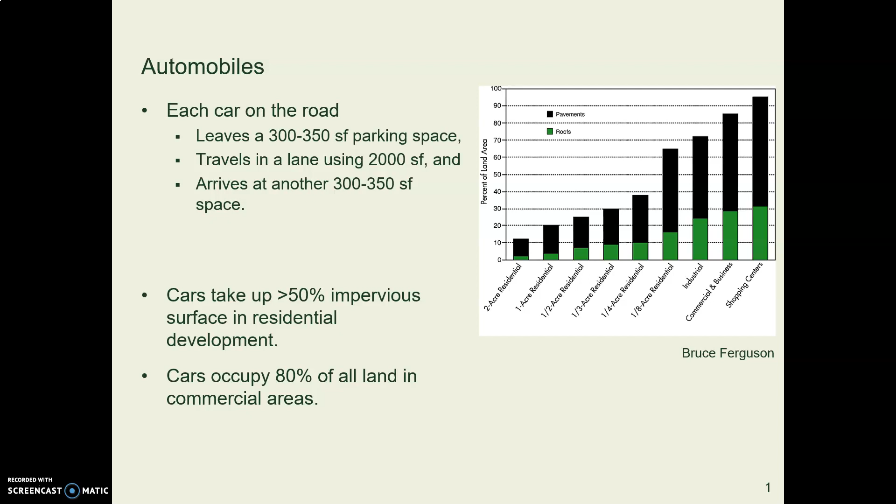cars and their impervious surfaces take up 80% of the land. So what can we do about that? What we can do is replace that impervious, solid surface pavement with porous or permeable paving. That means water can run through the paving and go down to the ground below and infiltrate.

So porous paving is actually a reservoir of rocks with some kind of porous surface over the top. That's the way it works.

Some years ago, in an earlier generation of staff at the college, some staff who were interested in sustainability were looking at a parking lot, and they said, we would like to do the right thing. We would like to put in a porous parking lot. So what should we do? And sadly, I had to tell them that it was going to be expensive.

What I did was put gravel in a bowl. I got a bowl, put a bunch of rocks in it, and put a piece of hardware cloth, wire screen, over the top. Then we sat down and talked, and I showed them how the bowl was like the reservoir in the parking lot, this deep reservoir of rocks that actually does the work, and that paving, whatever it is, bricks or whatever you've got over the top, is the surface that lets the water through. But you have to have that bowl of rocks underneath, at least 18 inches deep.

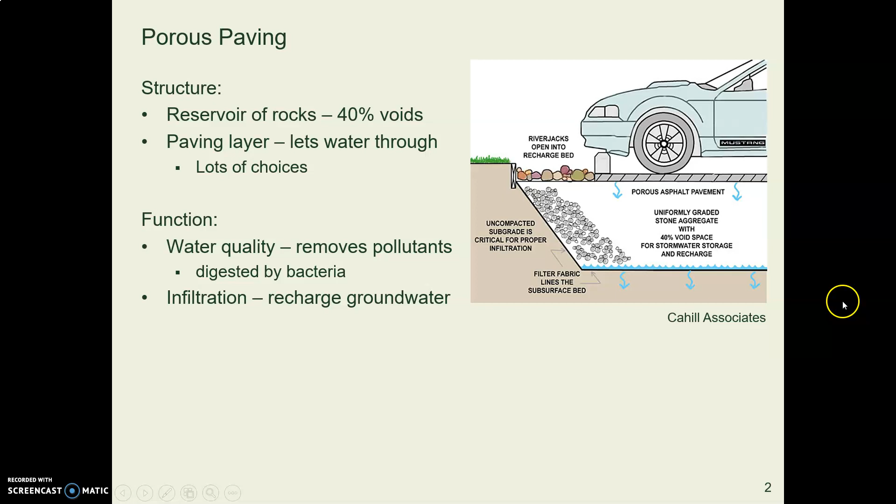This reservoir of rocks does two things. First, those rocks provide surfaces for bacteria to live on, and the ones who take up residence are the ones who really like to eat petroleum. So as stuff drips off the cars, those bacteria in the reservoir start eating that petroleum and breaking it down, and they break down a few other kinds too. Then, as the water drifts down through this bed of rocks, it gets down to the soil on the bottom and can infiltrate and recharge the groundwater.

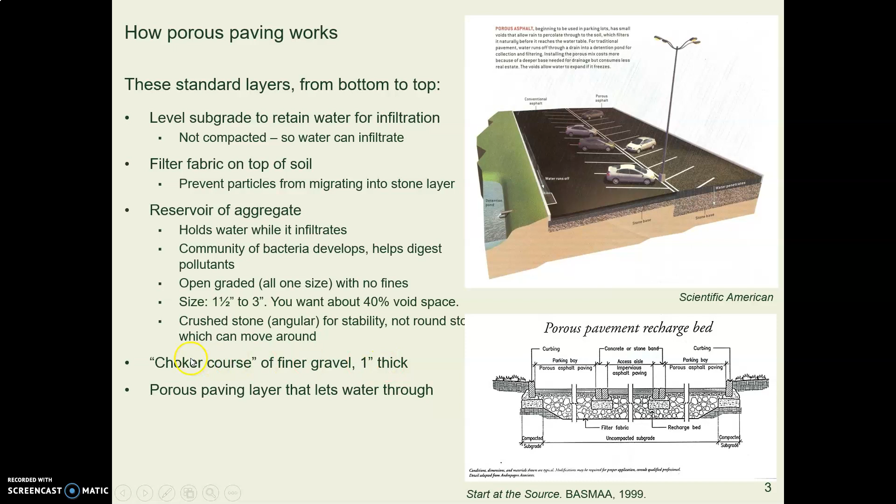There's a whole series of layers, starting at the bottom with the plain soil and coming on up to the reservoir, a thin layer at the top, and then your porous paving, whatever it's made of.

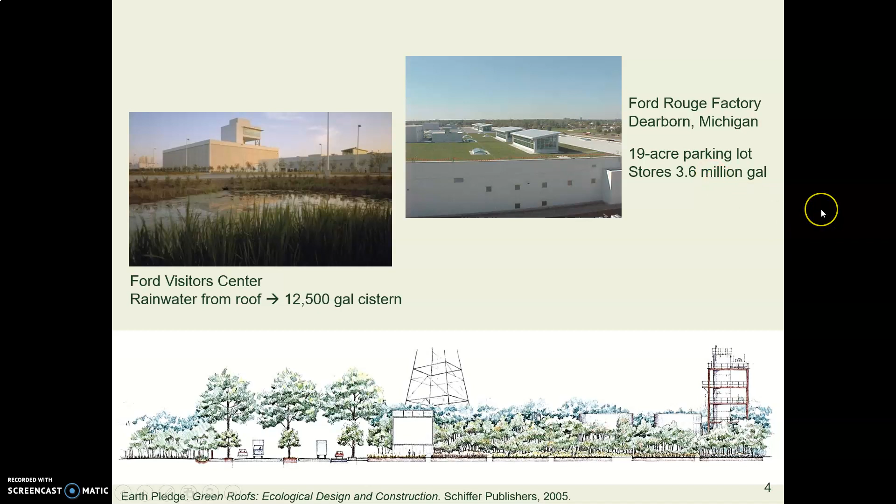Here is just a nice example of a vast porous paving parking lot, well, 19 acres, at the Ford Rouge River truck plant. And according to the designer, it stores 3.6 million gallons of stormwater runoff.

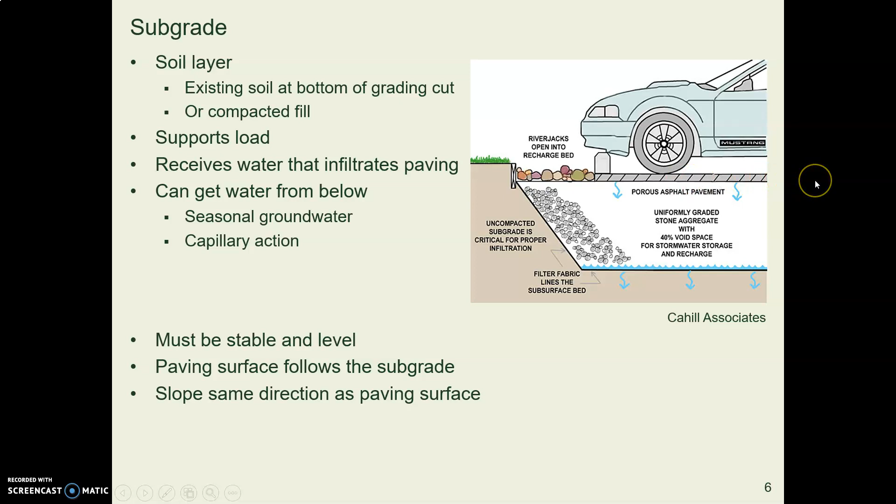And it has to be stable, has to be relatively level, but it will be at whatever angle your paving surface is at.

Now, some people will say, oh, we can't put a porous paving here because our soil is not permeable enough, we can only use sandy loam or whatever it is. But I call your attention to this recognized expert on stormwater, Bruce Ferguson. There are two prominent experts on stormwater that I turn to in the U.S., and one of them is all the people in Portland, Oregon, especially people at the Bureau of Environmental Services, and Tom Liptan, and Bruce Ferguson, who's a professor at University of Georgia, and he's done a ton of research gathering data on how this stuff works.

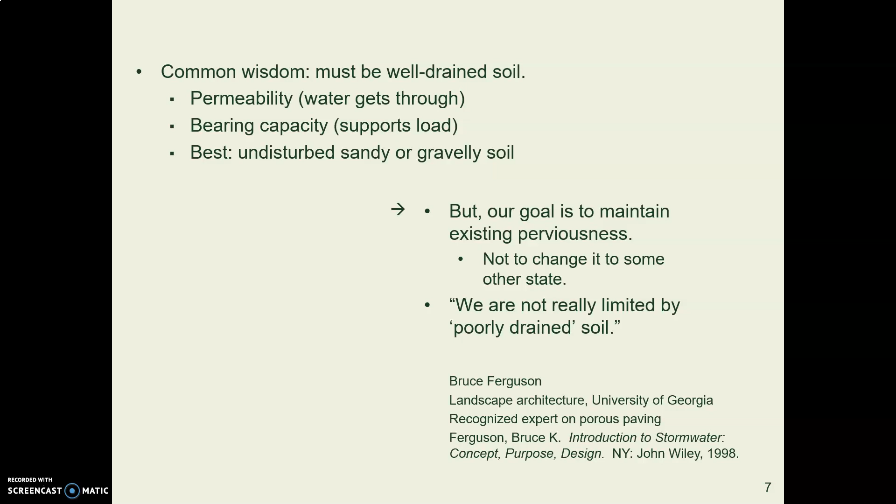And what he says is our goal is not to change to some other kind of soil. Our goal is to restore the hydrologic cycle, whatever the condition was that was there before we paved over it. So we're not limited to sandy soil, we're not limited by poorly drained soil — we're going to use what is on site.

That was the subgrade. In the reservoir, that thick layer of rocks that stores the water has to be open graded, they say. And open graded means it's all one size of rock.

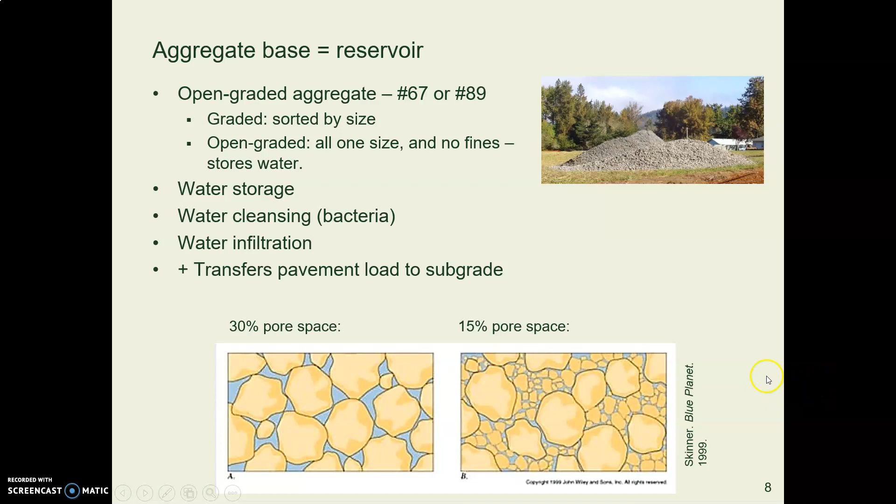And just a point of interest, where do you get open graded rock?

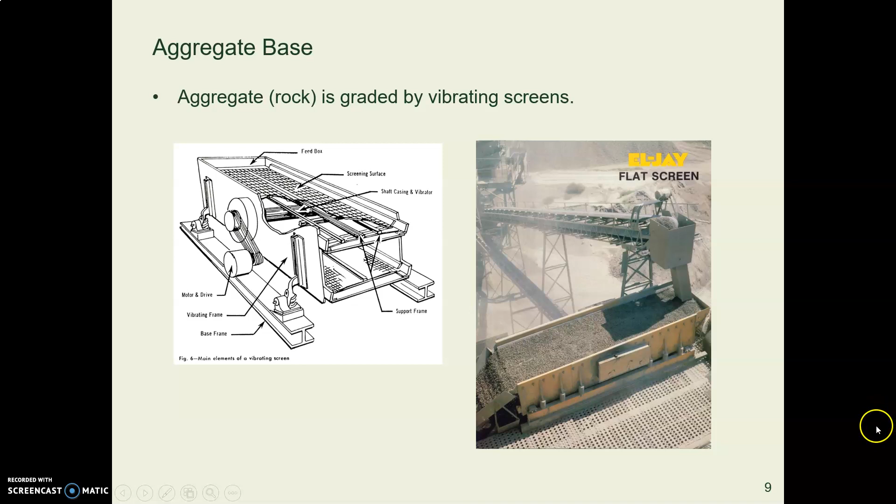Sand and gravel pits, including some in Eugene and outside of Eugene, use vibrating screens with 2 or 3 decks of wire cloth. They vibrate back and forth, and rock dumped onto the screen is sorted: whatever is bigger than the opening bounces off and gets carried away, while whatever is smaller falls through to the next deck, where a different size of wire cloth repeats the process. As it passes through these layers, the rock gets resorted until you wind up with the same size rock.

Then the paving, the part that you see, is the covering that lets water through. It sits above this reservoir, and you can use unit pavers for this.

A magazine I subscribe to and always like to read is called Interlocking Concrete Pavement magazine—believe it or not, that's a thing. This picture is from that magazine. You can buy these pavers shaped so there are holes in between, and you can put pea gravel or sand underneath so the water runs through.

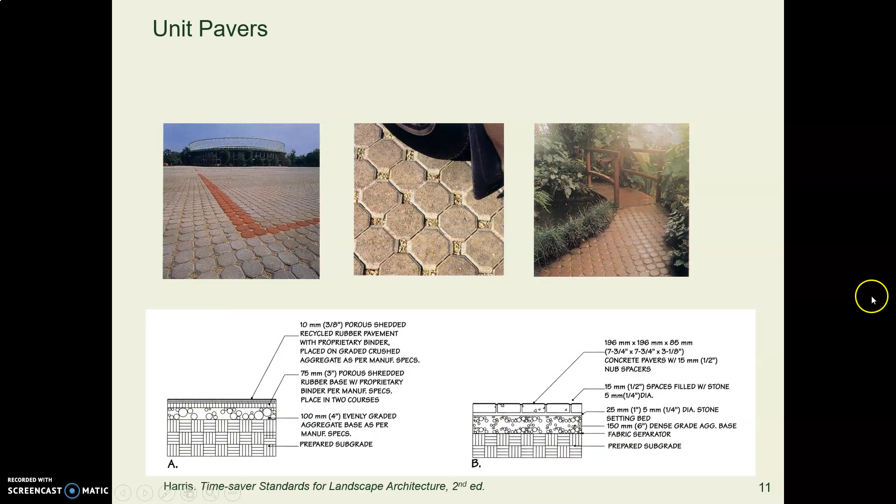You do need some kind of edging so the pavers won't gradually walk off the parking area.

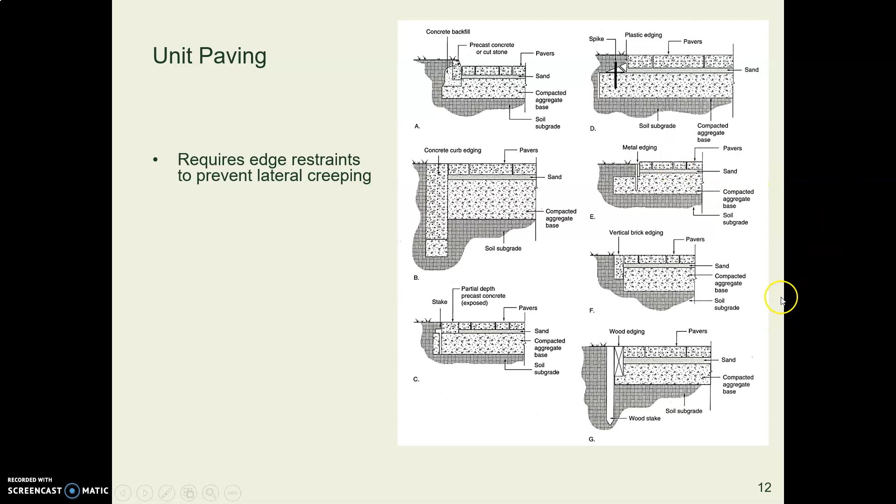An inexpensive way to have a permeable surface is with gravel or something like decomposed granite or pea gravel. You might find that in pedestrian walking places, and you can use it in parking lots too. It's a little bit squirrely—it rolls around—and you do have to have some kind of edging. It's kind of a pain to maintain because the rocks roll all over the place and escape. Also, if this is for a place with pedestrians, this is not an accessible surface—try rolling a wheelchair on this stuff and you won't like it.

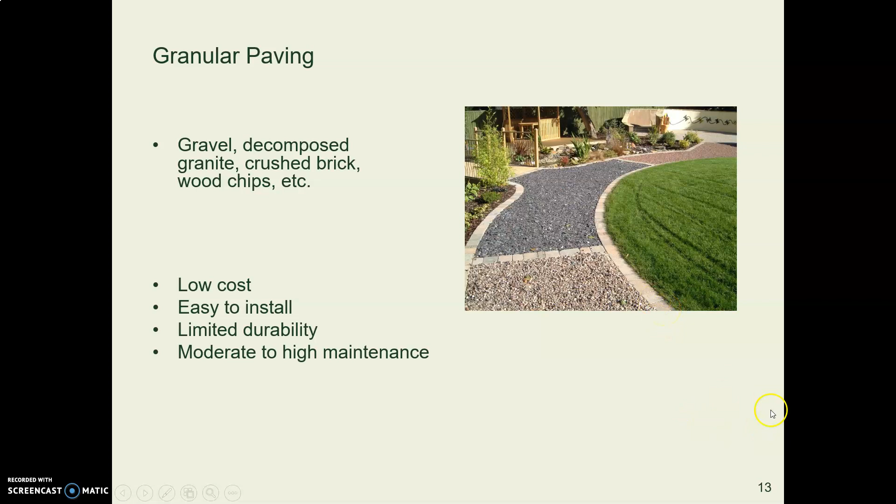You may have heard of turf pavers, which come in all different styles. The two basic ideas are some kind of plastic grid or cell, or some kind of concrete cell. You put that down on the layer underneath, and it's strong enough to hold up cars, trucks, and even big emergency vehicles. Then you plant grass in the spaces in between, and it grows up through the concrete or plastic cells. From a distance it looks like a regular lawn, and maintenance crews can come in and mow it.

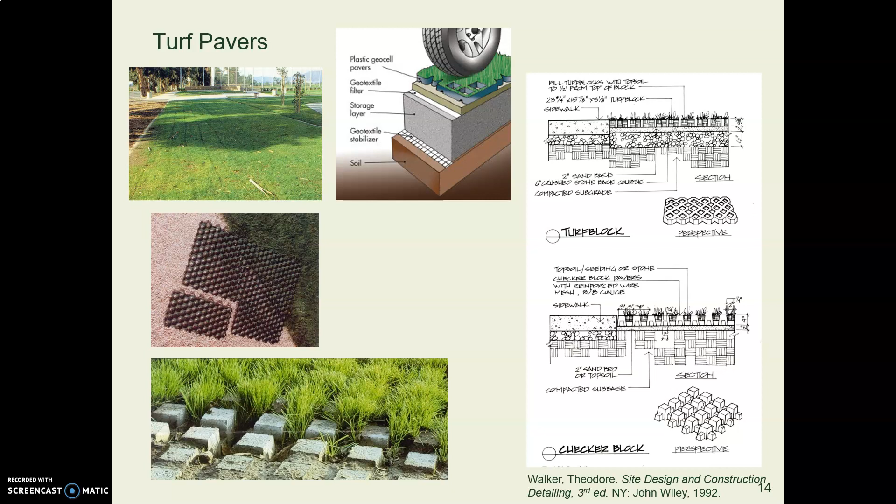You see this kind of thing often in overflow parking lots at sports arenas, and also in places where you want to maintain something that looks like a landscape but still want emergency vehicles to be able to drive over it.

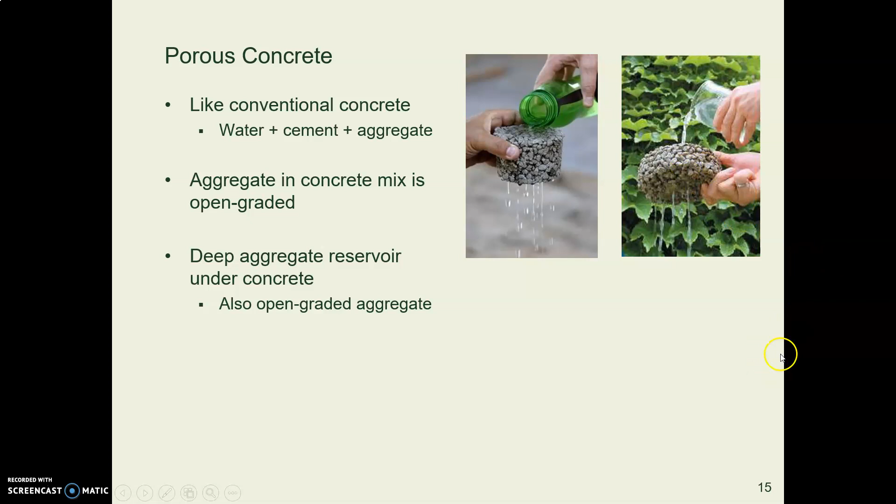Porous concrete is regular concrete, except the aggregate—the rocks—is open graded. It's just like a regular concrete mix of water, cement, and aggregate, but all the aggregate is one size. The same is true of porous asphalt: it's open graded aggregate, all one size.

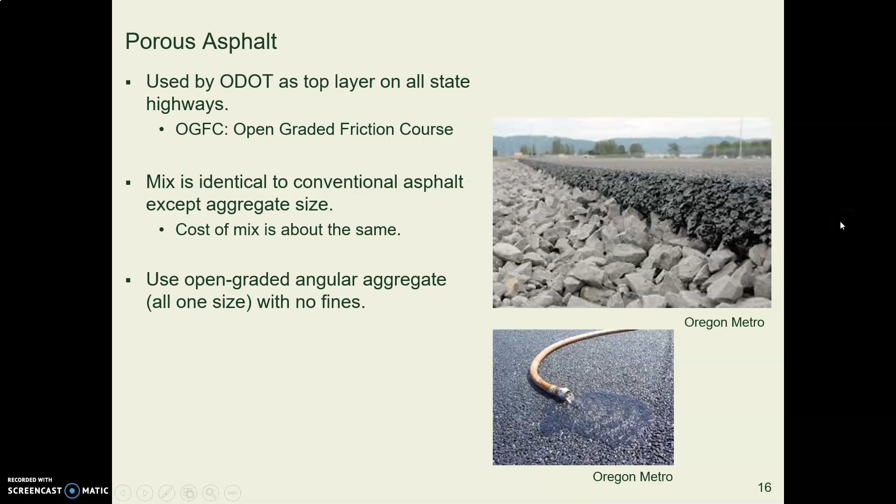In case you didn't know, the state of Oregon and some other states require porous asphalt on the surfaces of all their state highways. Think for a moment about why they do that—I'll let you think. It's not to manage stormwater, although that's a nice side benefit. They're trying to prevent water from ponding on the surface of the road and causing vehicles to hydroplane. That's their real goal.

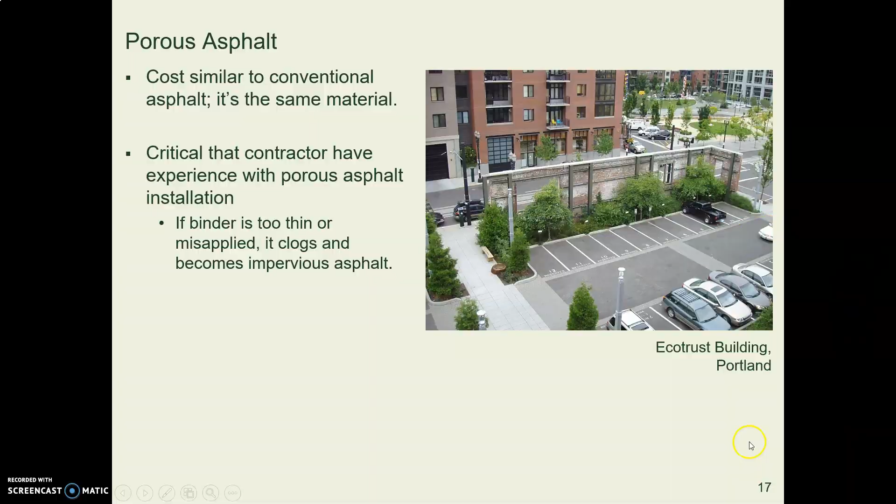Here are some more views of that parking lot, in case you haven't seen enough pictures of this.

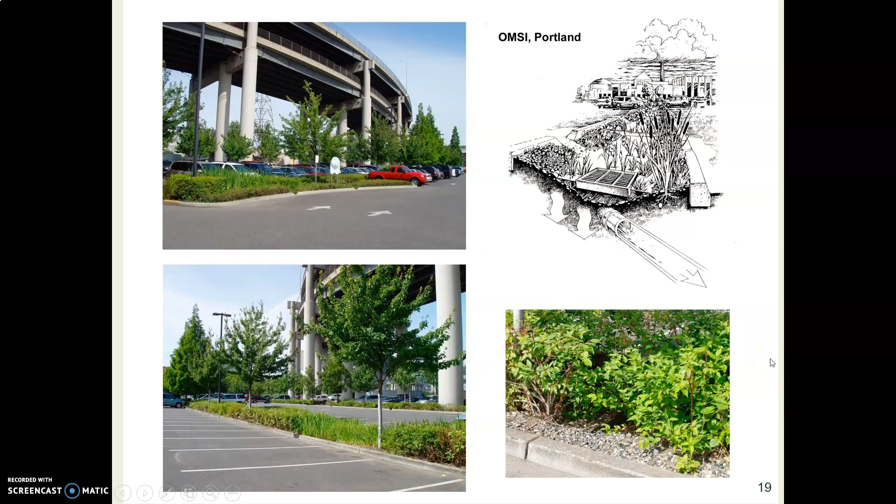If you've ever been to OMSI in Portland, you've noticed these strips of plants in the middle of their parking lots. OMSI was the first major stormwater facility in Portland, built in 1990. Here is a pen and ink drawing by the late Robert Marassi, who designed those swales—this was the city's first attempt at bioswales. They did some calculations and figured they actually saved $78,000 in 1990 dollars by avoiding stormwater pipes.

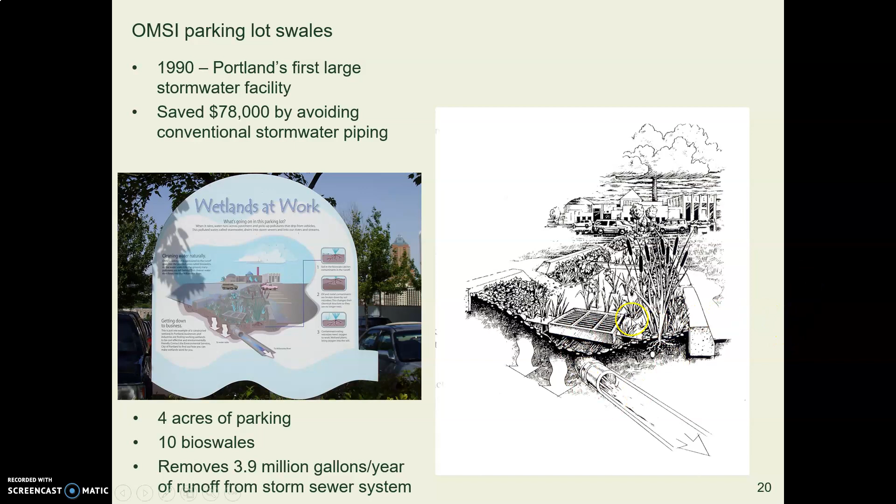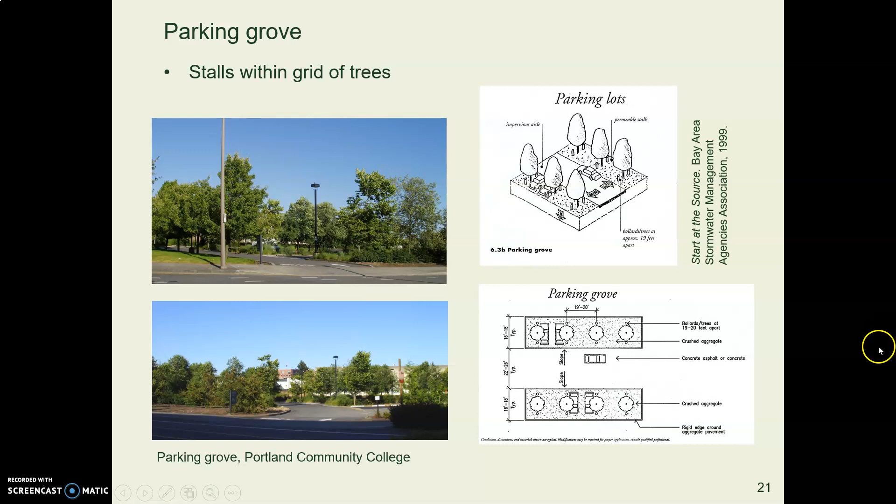Across the road from OMSI is a satellite campus of Portland Community College, and they have what's called a parking grove, where parking stalls are interspersed with trees.